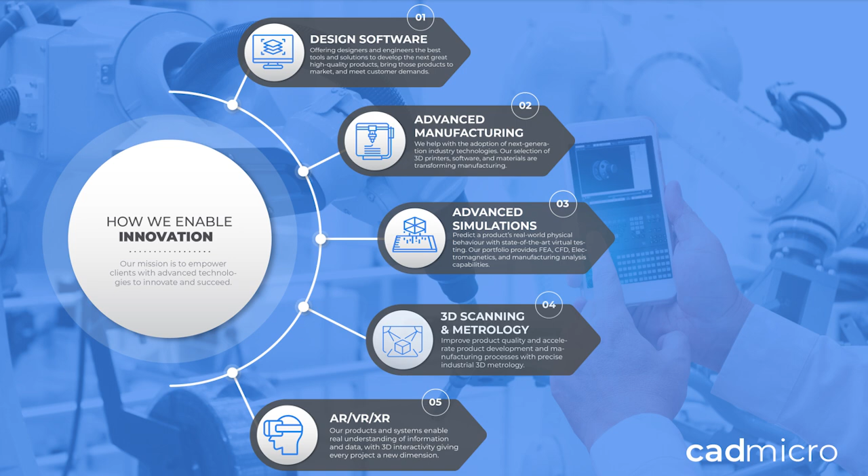Hello, everybody. Thank you for tuning into our webinar. My name is Fabio Colella. I'm a digital manufacturing application specialist here at CAD Micro Solutions, and today I'll be introducing and demonstrating Factory Simulation Engineer. This is a Delmia role on Dassault Systèmes' 3D Experience platform.

Today we'll be introducing the solution, identifying the needs of modern production, and then showing how Factory Simulation Engineer can meet these needs. Afterwards, we'll have a demonstration of it, followed by a question period before ending the webinar.

So what is Factory Simulation Engineer? Factory Simulation Engineer is a role on the 3D Experience platform that provides tools for manufacturing layout design and for factory flow simulation. Because it's leveraging the 3D Experience platform, along with it we get intelligent data management and tools

that enhance our collaboration. Through this, we can utilize concurrent engineering, meaning that our production planning can happen simultaneously with our product development, reducing our overall time to begin production. As an added plus, we also get large assembly performance, which is crucial for laying out and simulating real manufacturing scenarios.

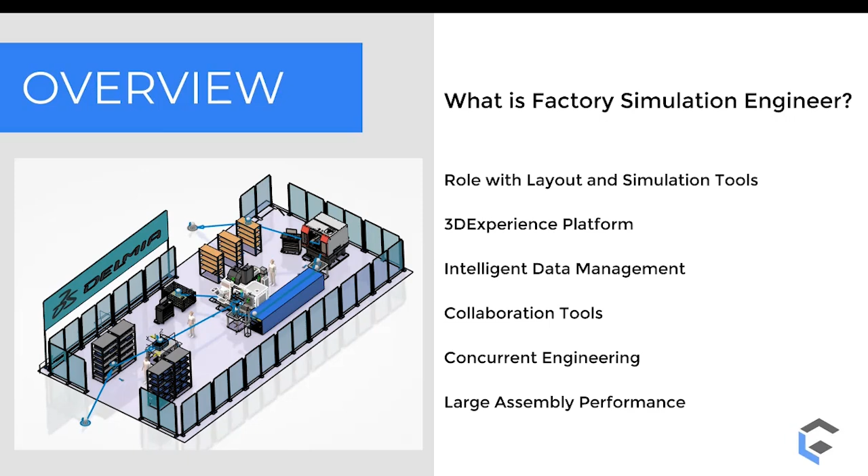So we've introduced the solution. Now let's briefly talk about the needs of modern production. As technology improves at increasing rates, all companies must grow to be competitive. We live in an experience market driven by high customization and demand by consumers. If we cannot be agile and smart in our production, we may face issues and adversity against our competitors who are. In order to work smarter and not harder, we need tools to help us do that.

In modern production, we need 3D visualizations and realistic simulations so that we can effectively plan and improve our manufacturing. We also need cloud-based solutions and data management systems so that all stakeholders can remain connected, from operators all the way up to upper management. Lastly, we need tools for team collaboration so we can improve our communication and streamline our workflow. Our ultimate goal is to be tracking and managing our KPIs so that we can always be improving our processes.

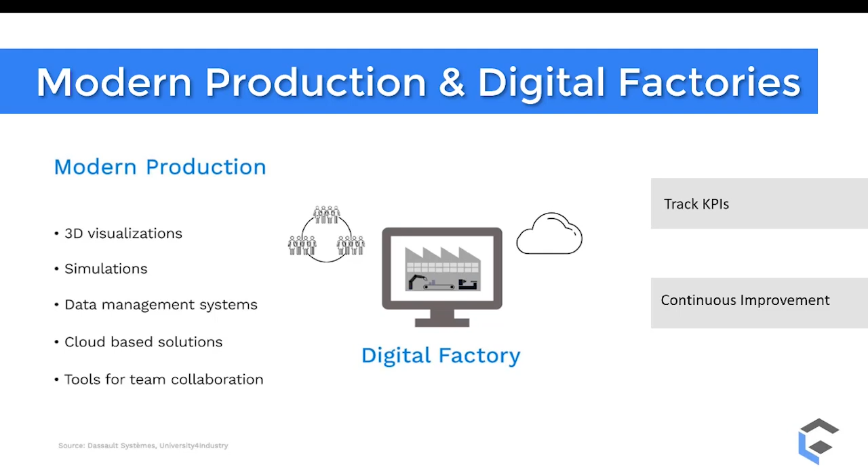Digital factories are like virtual twins of a real plant, where we want the digital factory to have the tools that meet our needs. Though there are many solutions that can house virtual factories, they are not all created equal, and some won't meet all of these needs. Factory Simulation Engineer is a solution that will.

Factory Simulation Engineer is a two-part solution. We have plant layout design, which allows component positioning and 2D, 3D visualization capability. It comes with a standard resource catalog for building factories, and it can also handle point cloud data of your greenfield or brownfield projects. This adds extra value when producing visualizations for all stakeholders in a project.

We also get factory flow simulation, which provides discrete event simulation and has a capacity to handle complex processes and scenarios. It can handle workers, AGVs, robots, pathways, CNC machines, so that we can simulate every process that would actually happen in our plant. It would also be used to analyze statistics and to identify bottlenecks or points of improvement.

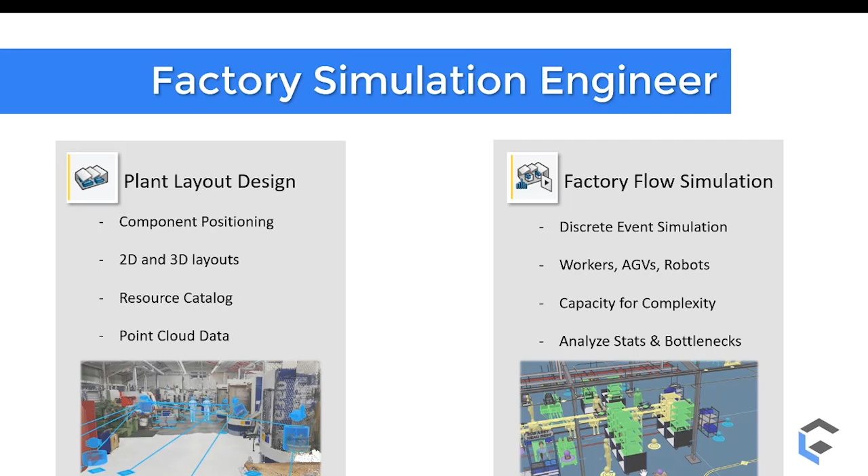And remember that these are all provided through the 3DEXPERIENCE platform. So in addition to their main capabilities, we get to manage our data smarter and work more efficiently as a team. With these tools, industrial and manufacturing engineers can create new efficient manufacturing plans, address production issues, and work on continuous improvement initiatives, all while minimizing risk and maximizing confidence that when we invest time and money into our plans, they will be successful. So they will produce better KPIs, they will improve our logistics, and they will improve our shop floor safety.

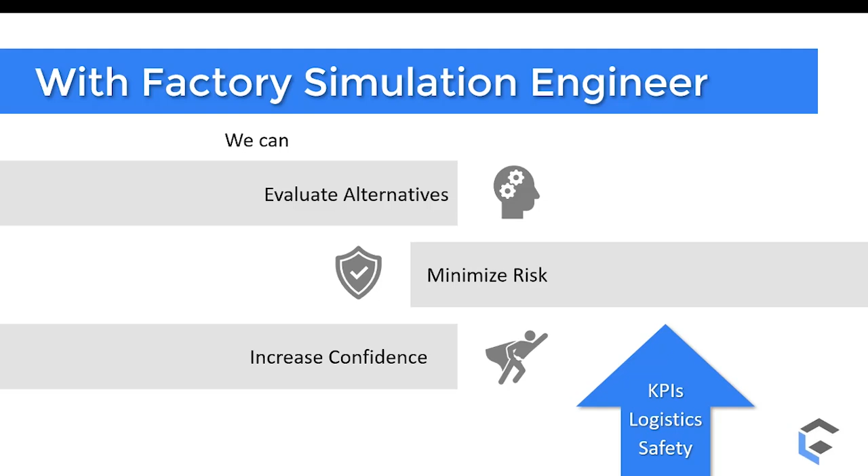We'll be creating the layout on the left side, which is a manufacturing cell that transforms the raw stock in the bottom left into the finished connecting arm on the bottom right. The raw stock has an initial machining process, an inspection, and a second machining process before being released for post-processing.

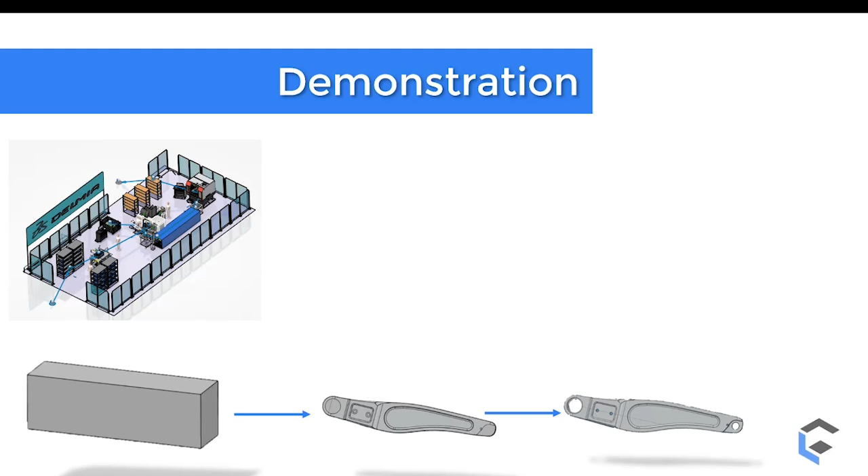We're going to complete the layout in plant layout design. We're going to complete the setup in factory flow simulation, and with that tool, we'll process the statistics and use them to determine some ways we can improve our current machining cell. Let's do it.

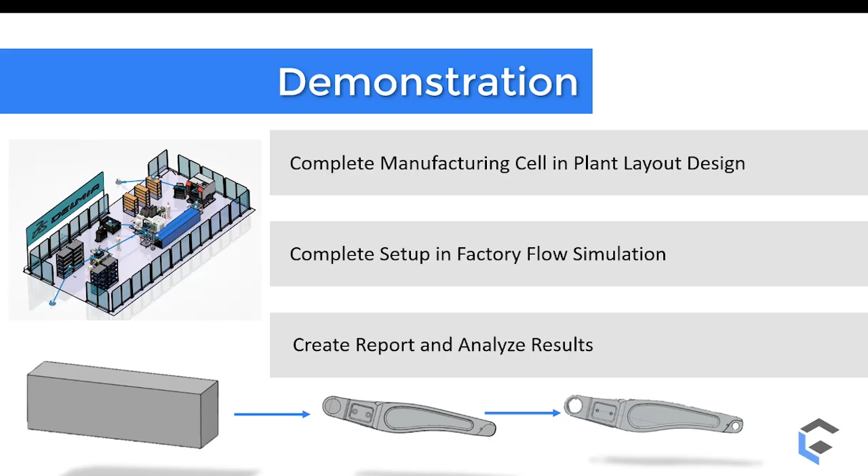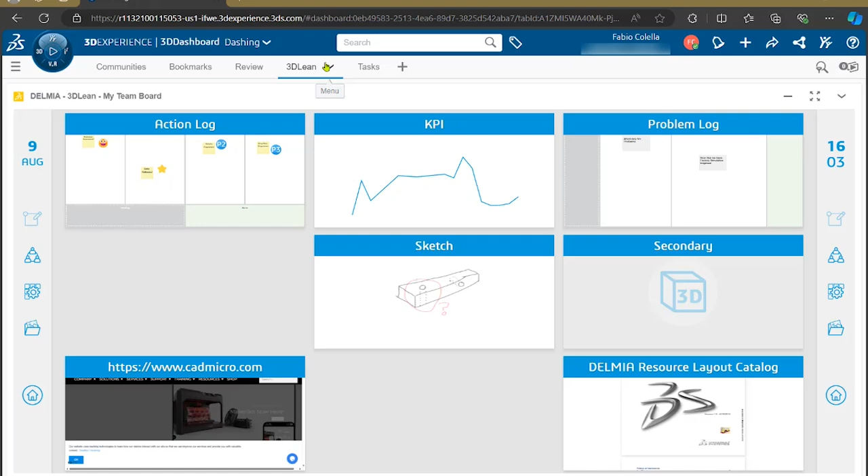Here I have the 3DEXPERIENCE platform opened up in my browser. Because Factory Simulation Engineer is provided through the 3DEXPERIENCE platform, we can utilize other apps and roles to improve our workflow and our collaboration. Here I have a Lean Team Player dashboard opened up, where my team can collaborate having meetings, sharing notes and documents, and tracking our progress through problems and production.

We have a note on our action log telling us to start working on our continuous improvement plan. My supervisor assigned me a task on the platform through collaborative tasks. When I open my tasks, I see one in the to-do section. My supervisor wants me to complete the layout of our existing manufacturing cell that one of my colleagues partially finished. I can move the task to in work.

In the task is an attachment of the manufacturing cell to complete. Because of the intelligent data system on the 3DEXPERIENCE platform, this is not a copy of the file, but a reference to the file. The platform's data system is built on single sources of truth and not worrying about file paths, duplicates, or broken links. And I can actually drag and drop this file right into my desktop app.

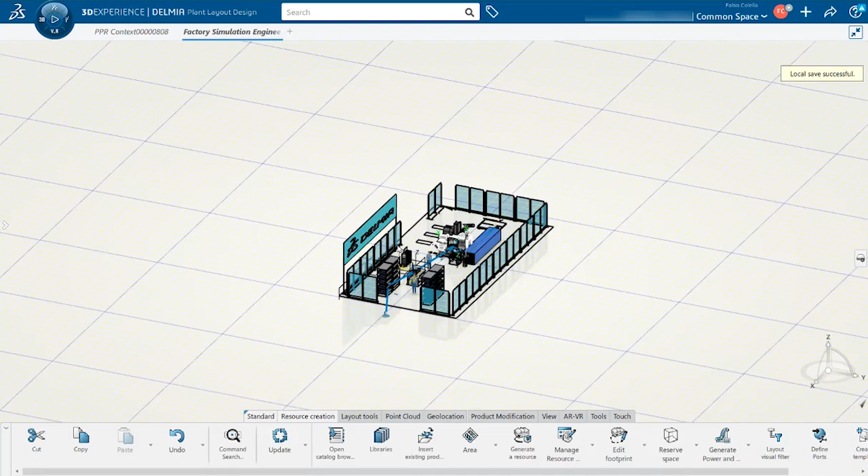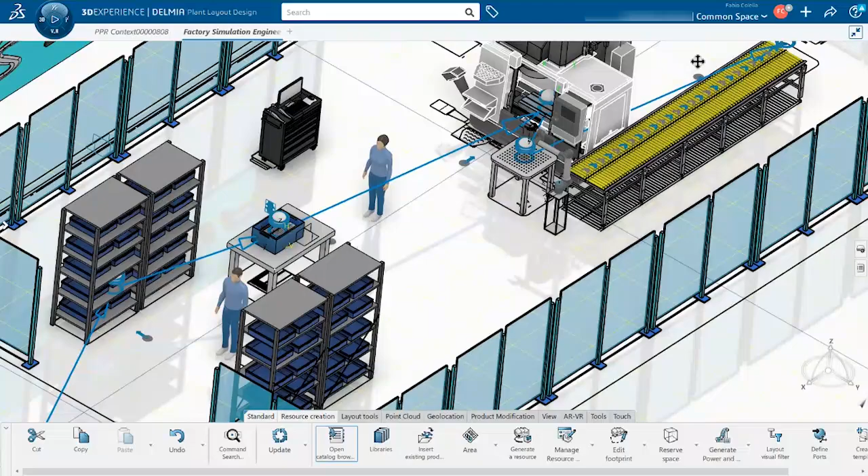Here we can see a cell partially laid out. We can see a couple workers, we can see some storage cells, a CNC mill, a pick and place robot, and a conveyor. On the right side of our layout, we can see a 2D sketch of our actual shop floor layout. We're going to use this to place the remaining items in their correct positions.

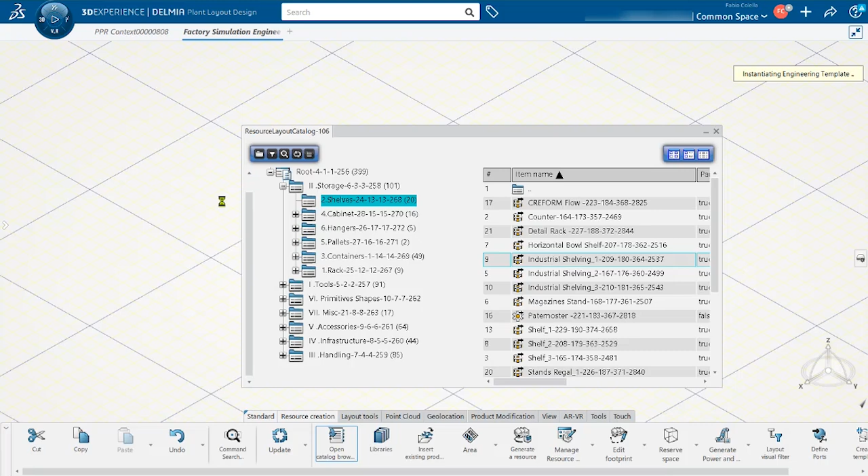We're going to open up our resource catalog that features a variety of different typical components that are very useful for layouts, like conveyors, storages, vehicles, and many others. Many of the resources are parametric, so they can be resized to meet your specs. We're going to use this shelf and drop it into place here. We will then modify the geometric parameters and then snap it into place.

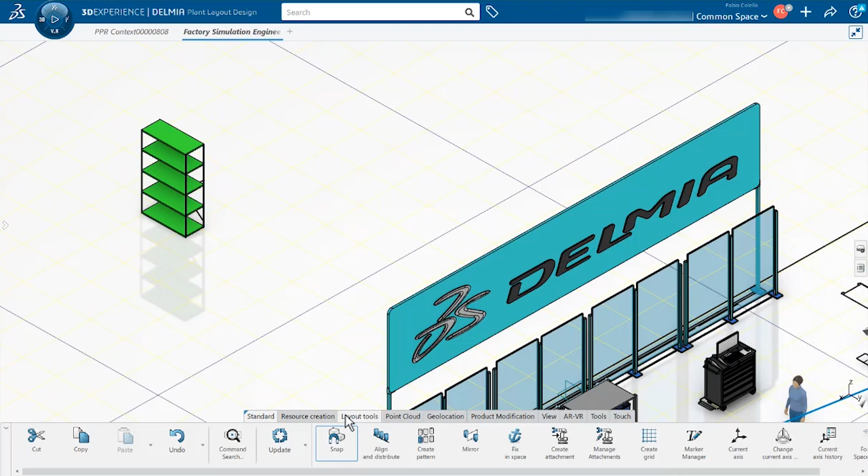For this particular shelf, we can modify the length, width, height, the number of racks, the rack thickness. In this case, the only thing we're going to adjust is just the width of it. Now we applied our geometric parameter changes, and now we're going to try to snap it into place. Using the snapping tools in plant layout design, we can select vertices and edges on our 3D models, and we can snap them to edges and points in our 2D layout.

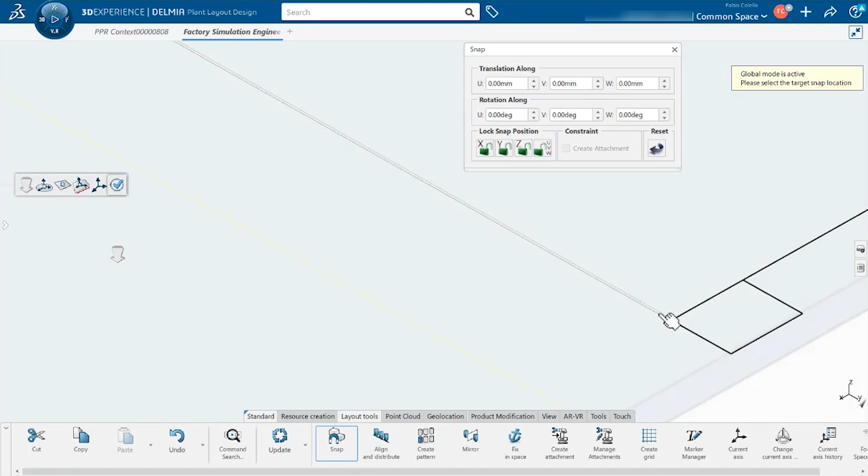Using the patterning tools, we can easily create patterns of our components in our layout. Now we'll drop in some components that we have bookmarked in our platform. If we go back to our browser and go to our bookmark editor, I can see bookmarks pointing to other components that I want to drop into our cell. We can easily drag and drop these components from our browser into our desktop app.

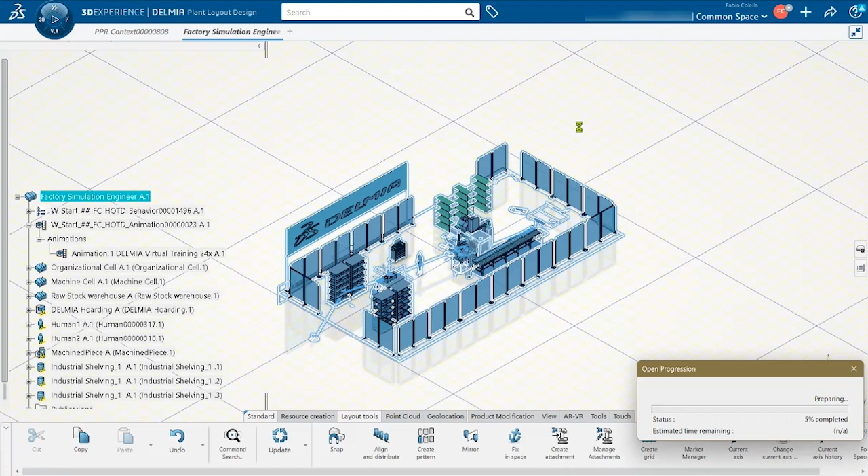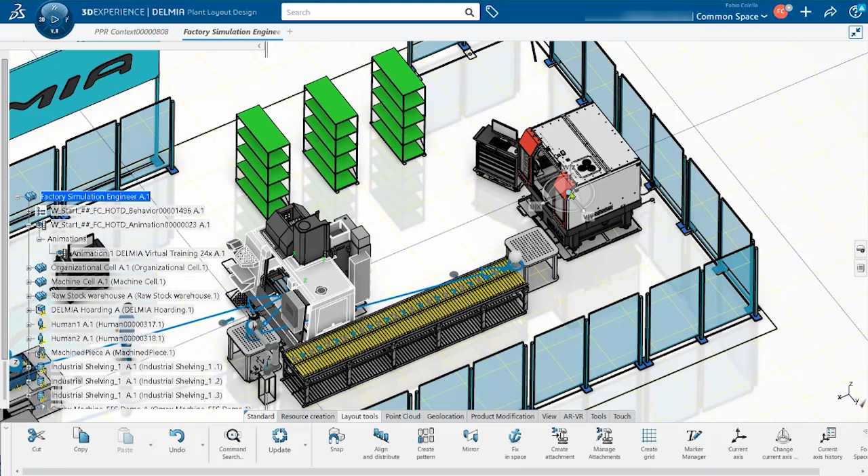We just put our second CNC machine and our inspection table into our layout. The inspection table is already in the correct position. We're going to use the layout tools in order to move the second CNC machine into position. Now we have our completed layout. We added another CNC for the final process of production, as well as an inspection table and some storages near the exit of the cell.

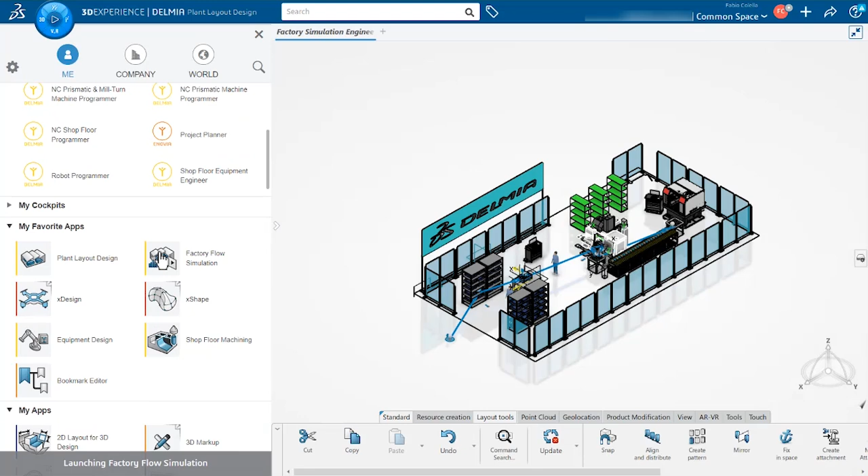Now we want to work on the factory flow simulation. We don't need to export any files or even open up a new program. All we need to do is go into our compass and select factory flow simulation, and now with the same file, we can complete all of our work. So now we've successfully switched over to factory flow simulation, and this manufacturing cell will remain the single source of truth, and we won't lose any data or interrupt any of our workflow.

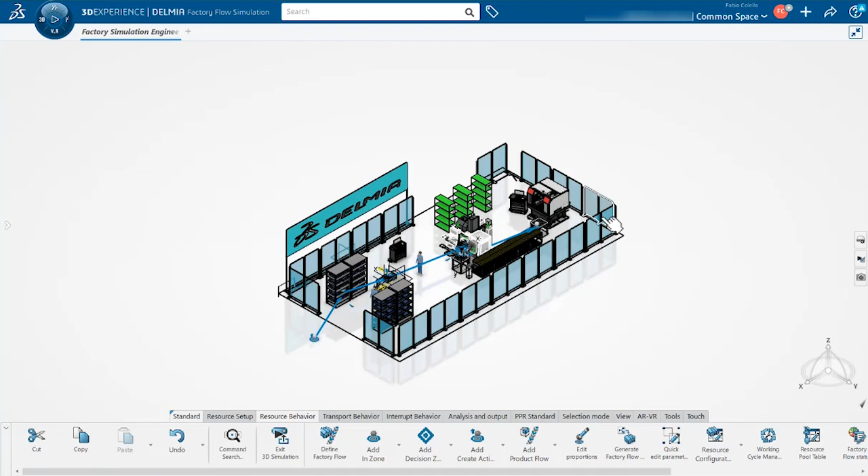What we want to do now is complete the product flow from one zone to the next, ensuring we set each resource and flow accurate to real life. We'll start by adding a third worker to the new section of our cell. We can add in resource zones that will represent where our worker will go when interacting with a product zone or completing an activity. A new worker has now been added into our manufacturing cell. We're going to drag them into the approximate zone that we want them to be working in.

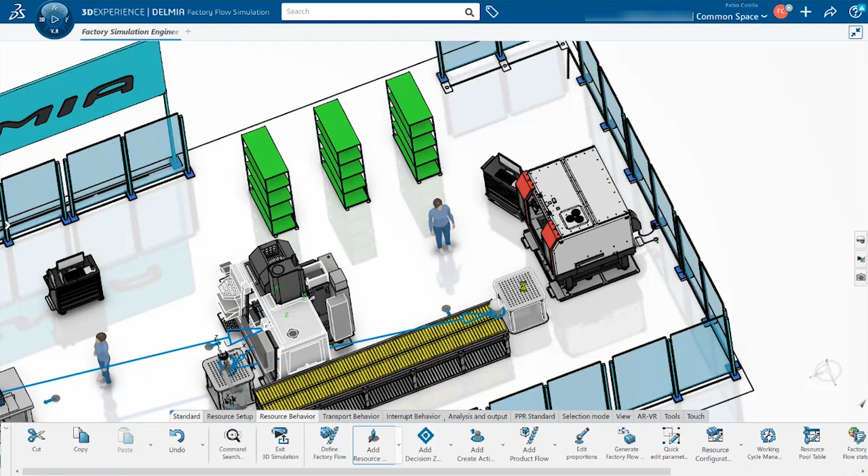After we place our worker, we're now going to place resource zones. These are the dots with arrows that will be placed right next to each resource that we'll be using. This is going to tell the worker where to move to when they're interacting with products and activities at those resources. We'll set one up for the inspection table. We'll set a resource zone for the second CNC machine. And finally, we'll set up a resource zone for the shelf.

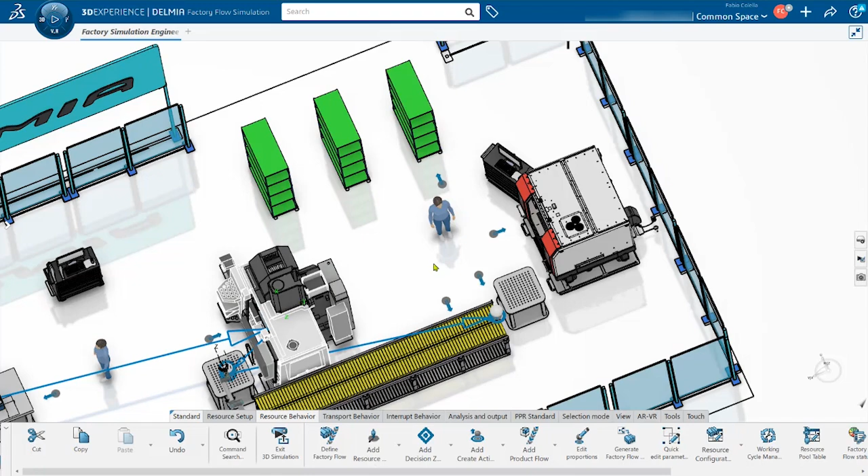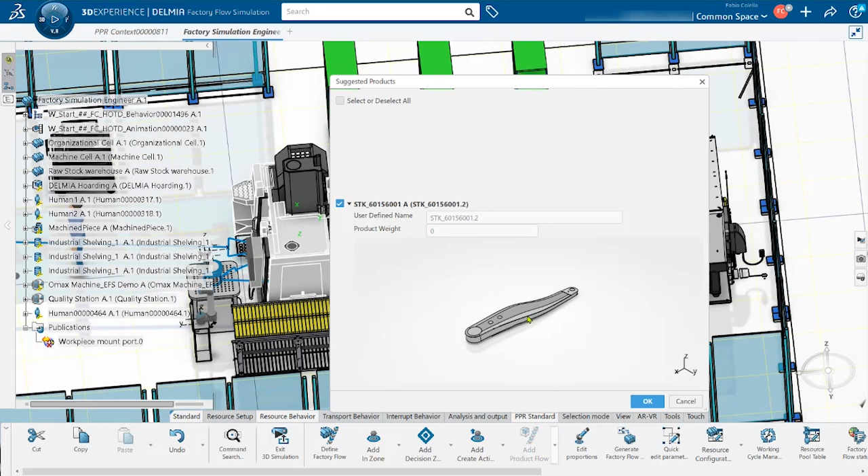Now that we've added our third worker and our resource zones, we want to start adding the product flow from each resource to the next. We're first going to add a product flow from the conveyor to the inspection table. It automatically picks up the part that we want to transfer. To the inspection table, we're going to add a generic activity.

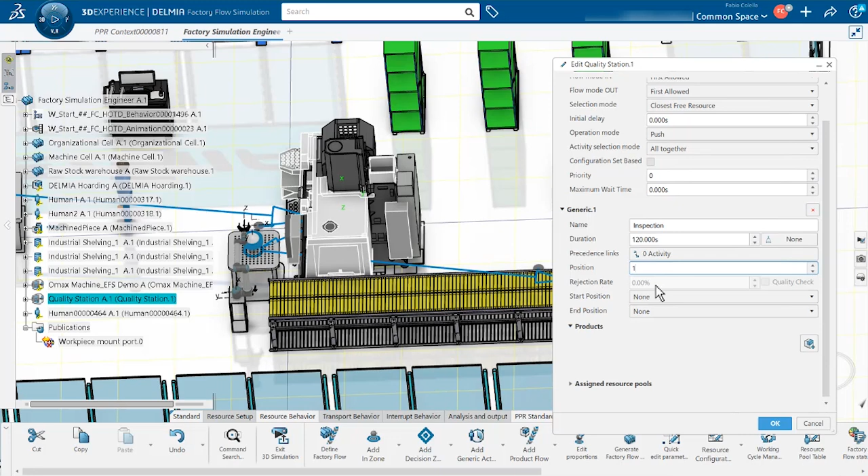This generic activity can be renamed to inspection. Inside of this activity, we can define how long it takes to complete, and we can also set a rejection rate. In this case, we're going to leave the rejection rate at 0 for simplicity's sake, and we'll set the duration to 2 minutes.

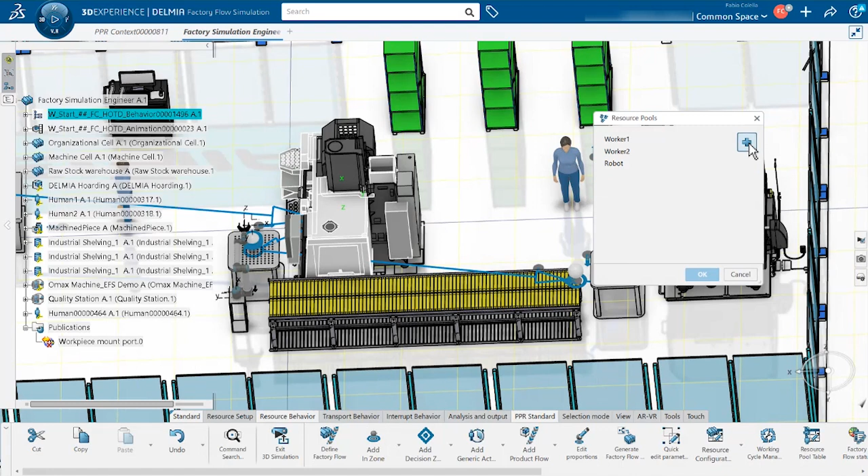This activity will automatically detect the product that will be used in it, and within the activity, we can also assign a resource to it. We're going to assign the third worker to complete this task. We can create a new resource pool that contains the newly added worker, and now they can be assigned.

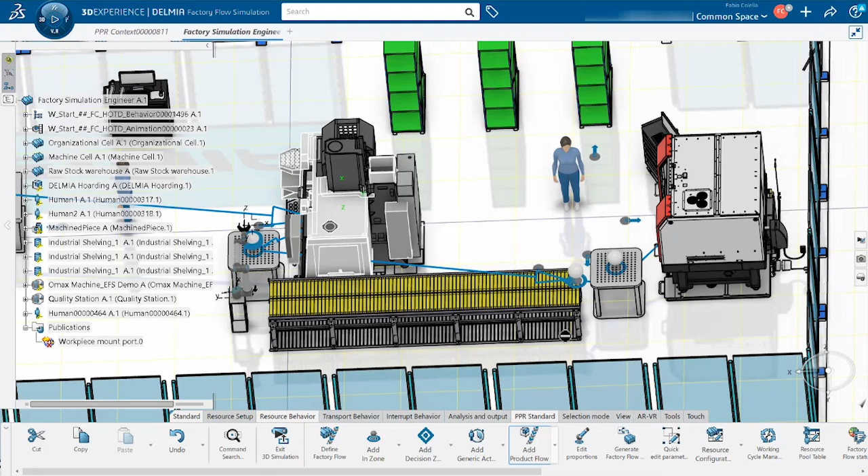From this point, we're going to add another product flow from the inspection table to the second CNC machine. Again, this will automatically pick up the product that will be used in the flow. Inside of our CNC machine, we're going to first add a load activity, followed by a transform activity, and then an unload activity.

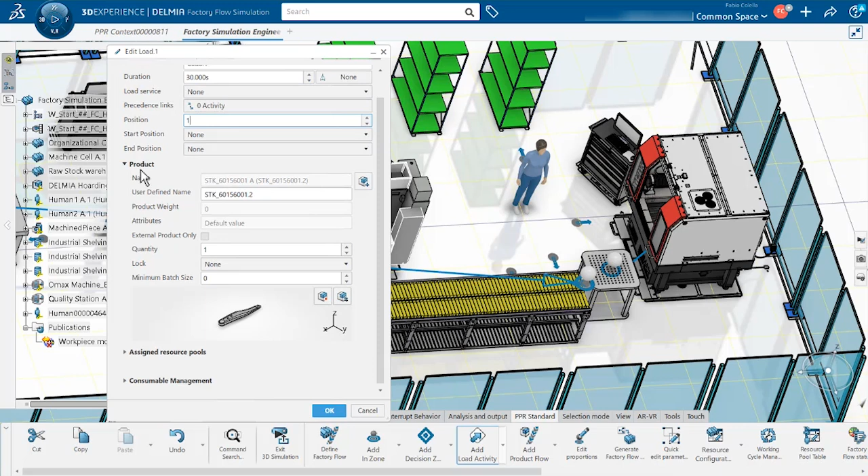In the load activity, we select our product, our intermediary stock. Here we can set a time for loading, set it to 30 seconds, and again we can assign a resource pool, which will be our third worker.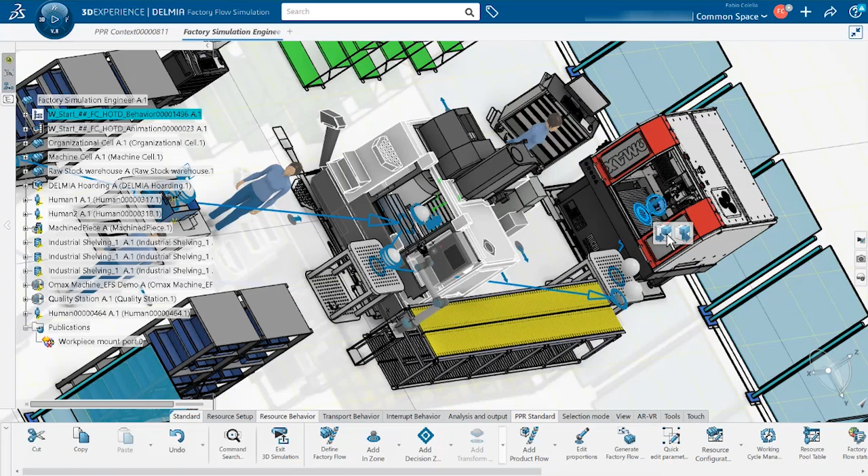Now we can add our transform activity. This is going to describe how the machine transforms one part into another. So we first start by selecting our input, which is the intermediary stock that we're sending towards it. After that, we're going to choose our output product, which is the finished product we already have sitting in our cell. So selecting it now.

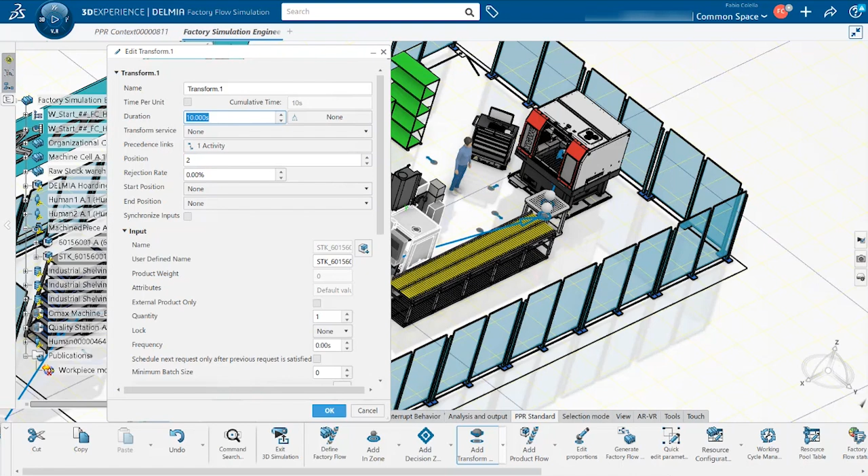You hit OK. And just like any other activities, we can define a time, we can define a rejection rate, and we can also, again, assign a resource pool. But because the machine is handling the transformation and not the worker, we won't assign a resource pool to this one. We're going to set the duration to 6 minutes. Here it lists our input product and our output product.

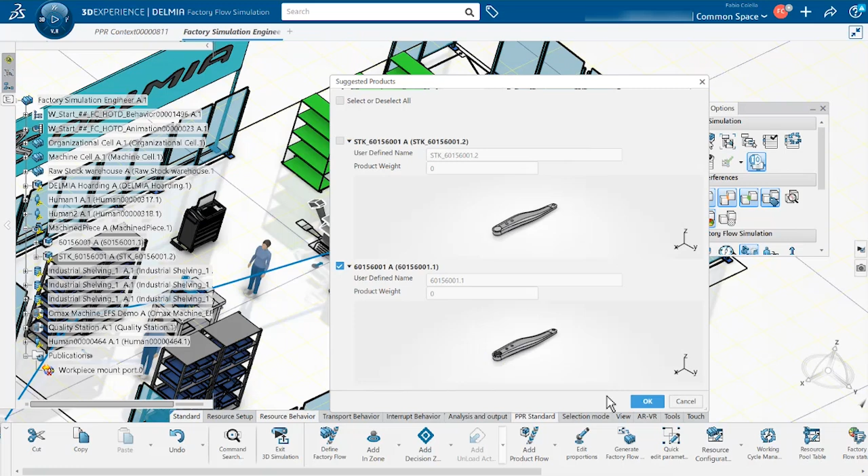And now we just have to add the unload activity. By adding load and unload activities, it's adding realism into our simulation, because not only is it capturing the time it takes to complete a cycle more accurately, but it's also going to be accounting for how much time worker 3 is interacting and busy actually working. So we're going to be able to tell how much they're being utilized when we run our report at the end.

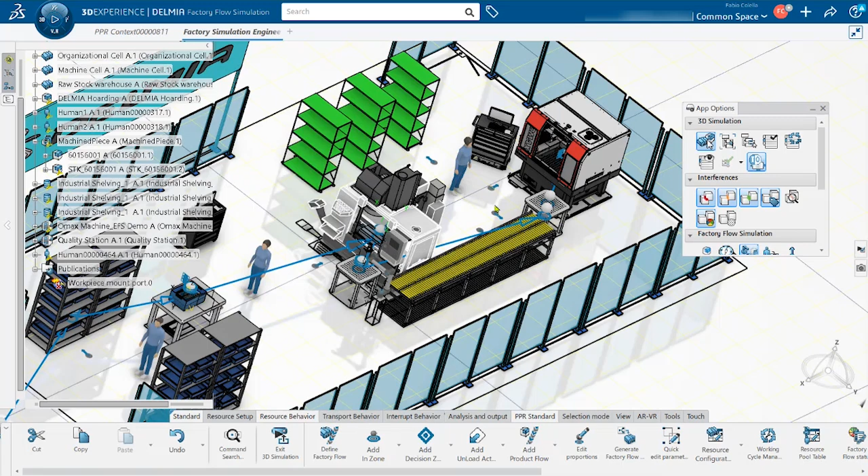Now we have to complete our flow from the second CNC machine to the storage shelf. And then finally, we're going to add an out zone. This out zone is going to be the end of our simulation. So on the far left, we have an in zone, which starts our simulation, and this out zone will essentially be used for dispatching and counting all of our outputted product.

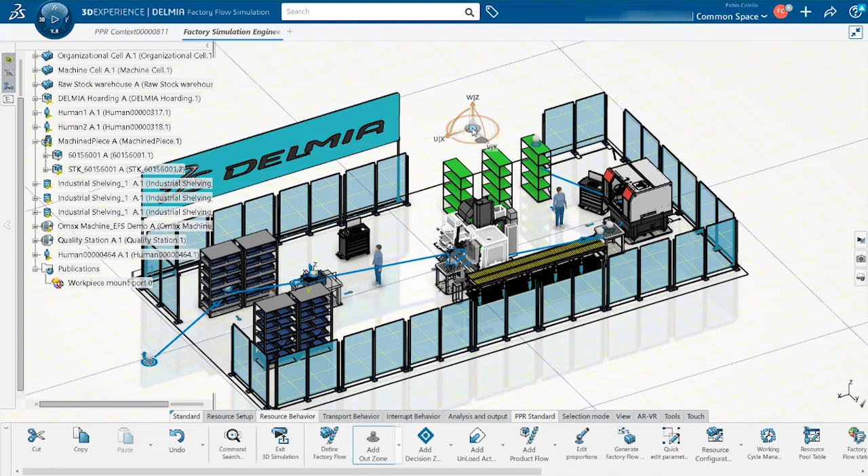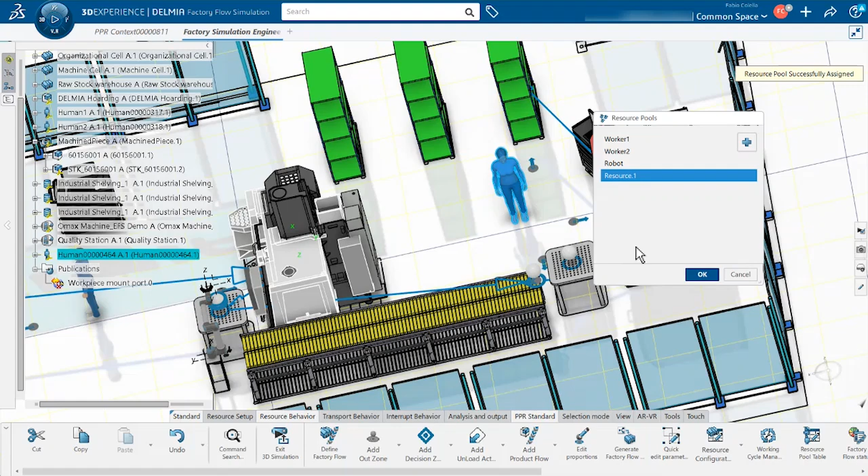Now the final thing we'll do is assign the worker to each product flow. And again, this is going to help capture how much this worker is actually being utilized, and it can also help to track things like ergonomics and logistics. If we see this worker has to walk a lot and in awkward areas, once we see that in the visualization, it's a lot easier to understand than if we have to try to imagine it ourselves.

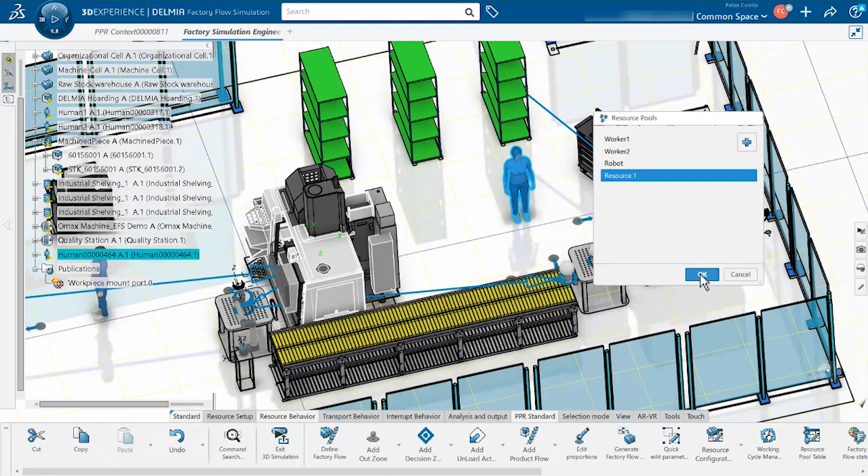So now we've completed our flows, completed our product zones, we've added activities to all of our product zones and completed the flows necessary. One option we have between our resource zones is to automatically compute collision-free paths for our workers. And if our workers had to cross stations, you can automatically compute that path, and you can specify how much clearance they require from an object in order to pass through.

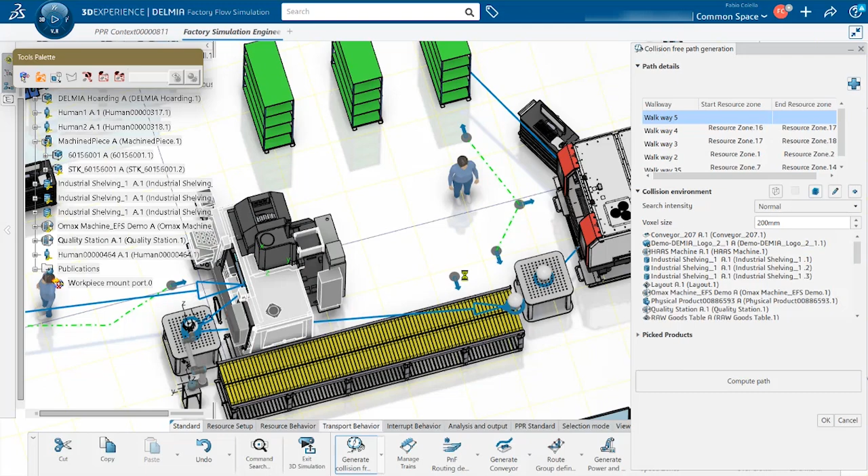And I'll show you some of these pathways made on this left side here. So you can see a collision-free path was made from the storage shelf to the secondary storage bin for that worker.

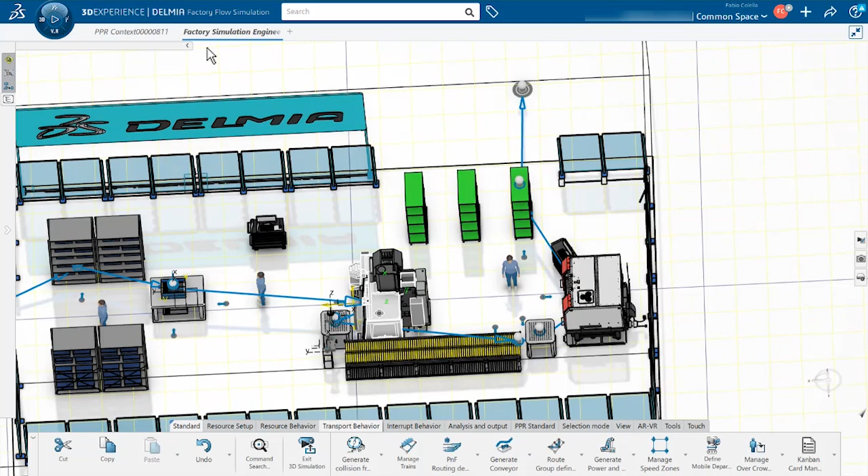So we've set up everything we needed to do for our simulation. All we need to do now is just to verify that our flow is going to be correct, so when we run our simulation, we're not going to encounter any issues. We can check the factory flow status very easily within Factory Simulation Engineer.

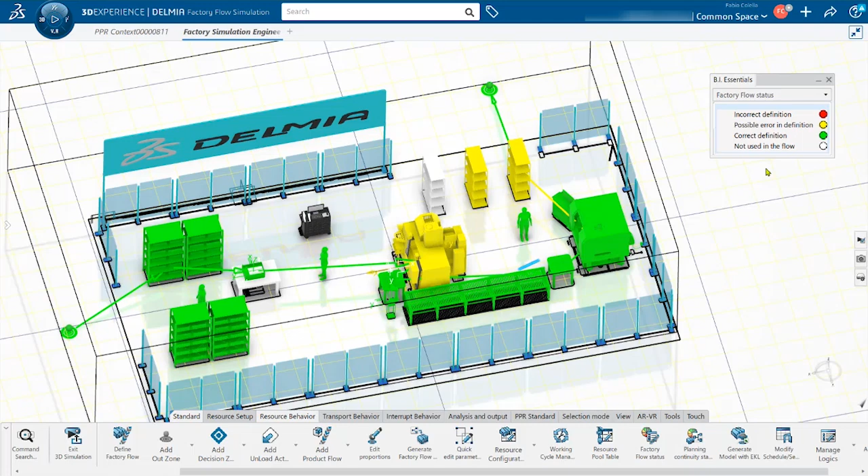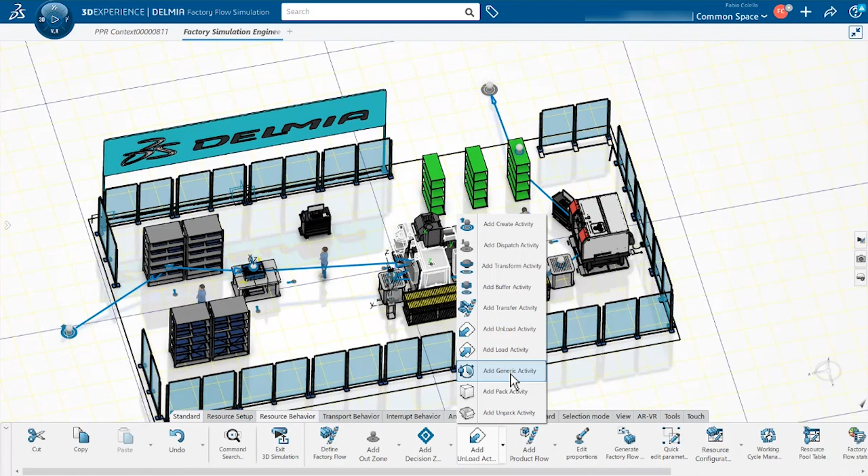This will give us a graphical display of varying degrees of issues or definition errors in our setup. So yellow can lead to possible errors, possible mistakes. Red would obviously be a serious error, and green is good to go. In this case, it's really just the output on our final shelf we're concerned with. It's not utilizing any activity.

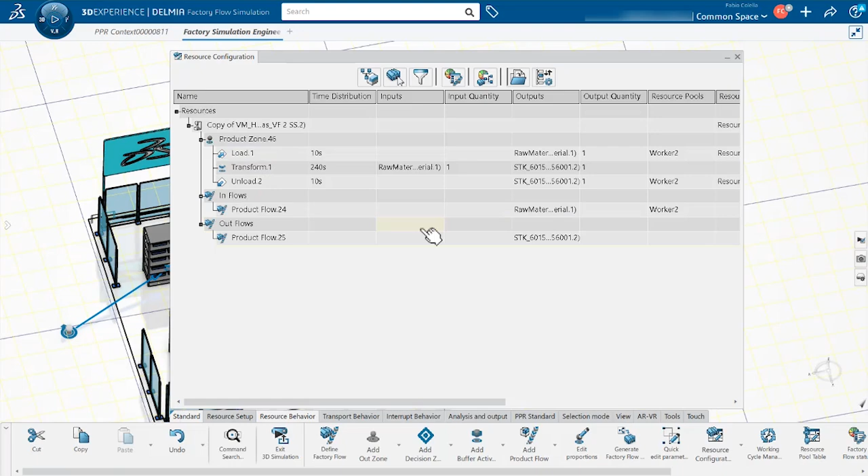So we're going to add an activity there, a buffer activity, which is going to represent the quantity of final products we're going to put on the shelf before it moves to the out zone. We can double check, and that first CNC machine showed yellow as well, but from the configuration table, I can verify the stuff that's important to our simulation is set up correctly, so we should be good to go.

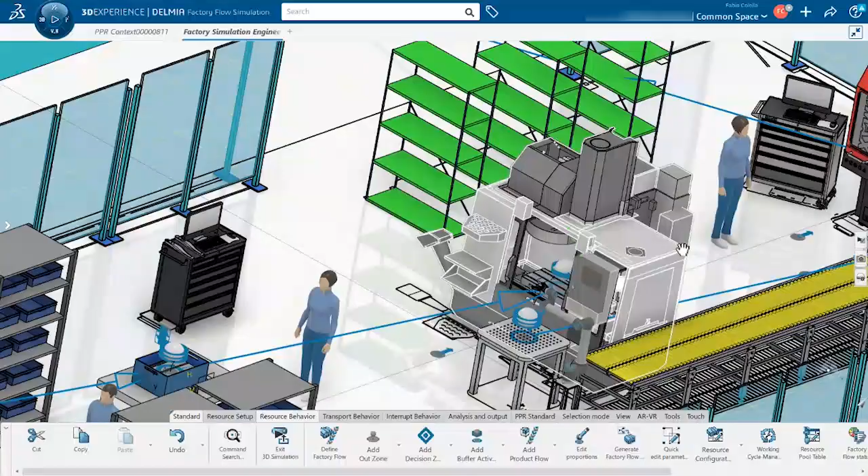Here we start with an in zone flowing to a storage shelf where worker 1 is going to move stock into that bin. Then worker 2 is going to take stock from that bin and place it into the machine. The machine is going to machine it down into the intermediary stock and place it on the table.

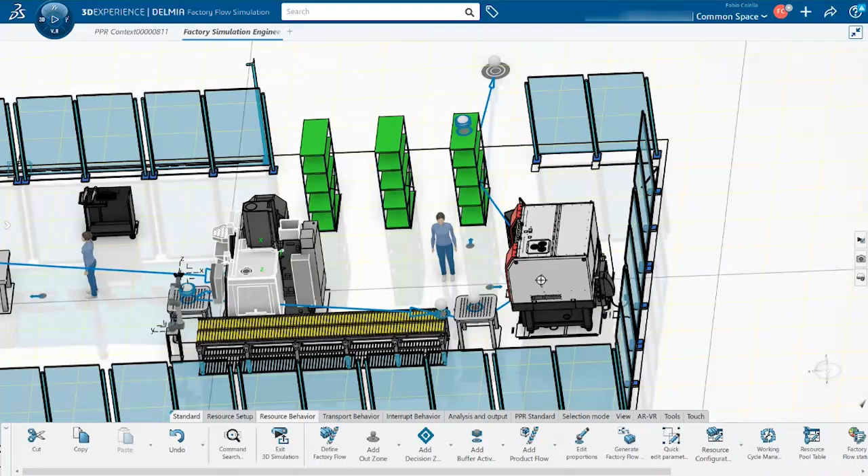There we have a pick and place robot who will pick up the intermediary stock and place it on the conveyor. It'll go down the conveyor where it is picked up by worker 3 and placed onto the inspection table. Worker 3 completes the inspection and moves it on into the second CNC machine, after which it is moved to a storage shelf and finally moved out of the manufacturing cell. We're good to start our simulation.

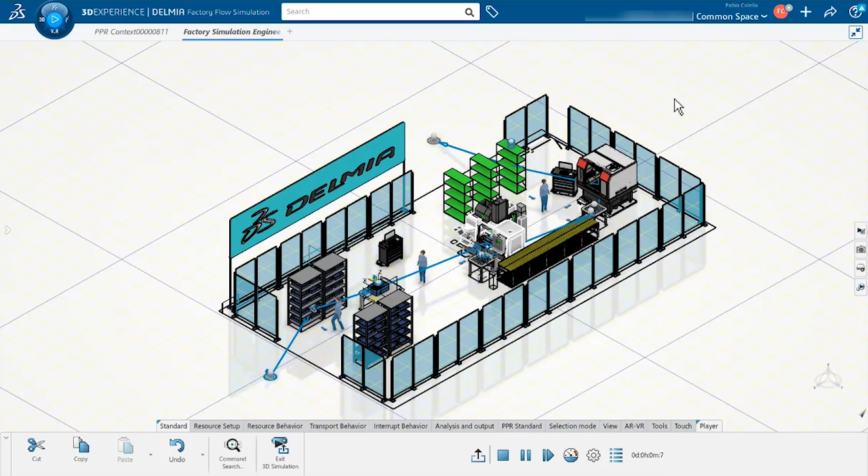To start our simulation, all we have to do is hit the play button in our compass. This will automatically begin simulation in our file. As you can see, the workers start moving right away. We have worker 1 placing stock from the first shelf into the bin. The bin has a capacity of 5. Worker number 2 will move that to the machine.

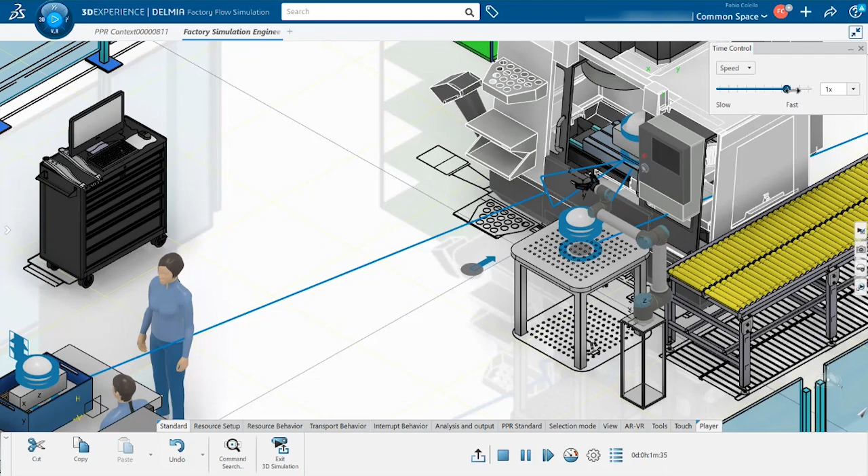I can modulate the speed so we can increase the speed of our simulation. So right now it's moving very quickly, a little too quickly for us to see, but it comes out of the machine, the robot moves it onto the conveyor, it gets put to the inspection table, inspection gets completed, the part gets removed from the machine to the shelf, and the part on the inspection table gets loaded into the machine.

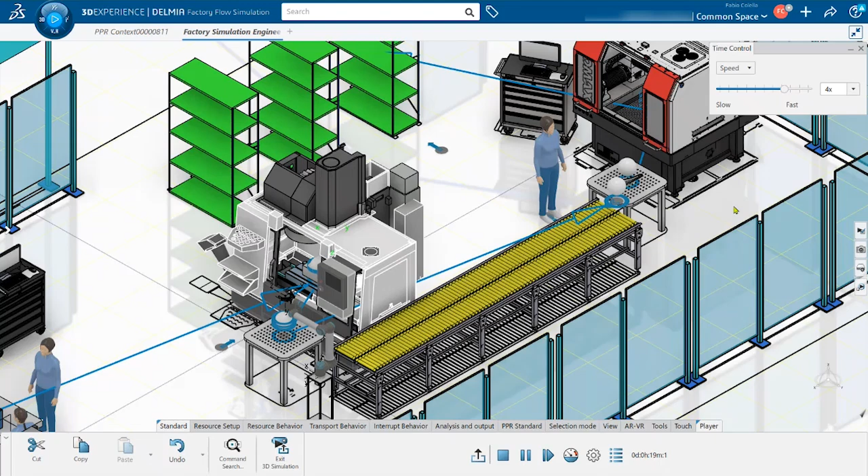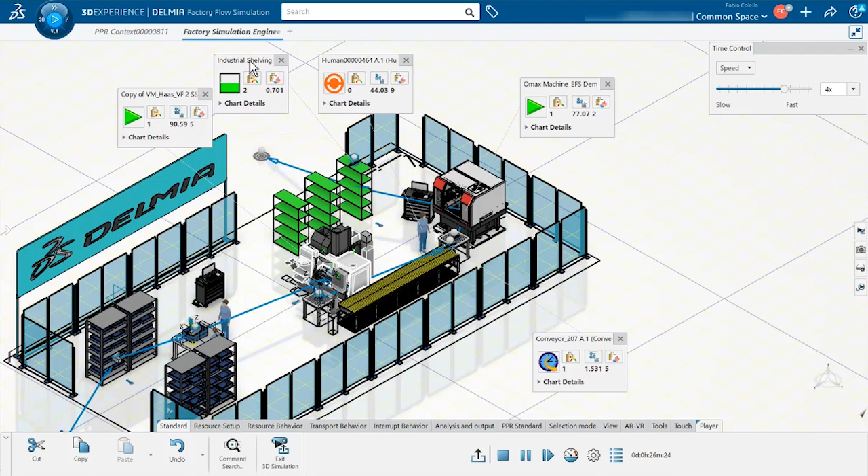Another cool option we have here is that we can click the different resources in our factory setup, and we can watch the live state of each. So we can see their status, how many items they've processed, how many are in process, and a variety of stats in the meantime. So every single resource and product zone that's involved in here, we can see it all. Really, really handy, especially seeing the status.

Being able to see the status of each one of our resources is really useful, because as we're just watching them, we don't necessarily know what they're doing, especially the machines, for example. So we can see when they're processing, we can see when they're idle. This also helps us troubleshoot our simulation.

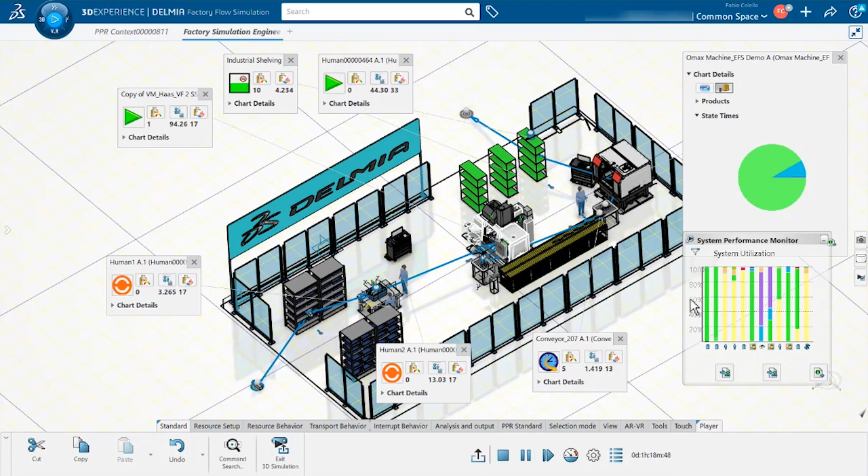We have some simulation options. We can enable replays, we can change our step sizes, stuff about our animation. We can define a lot of different settings that can help us get the power we're looking for. We can also open up this system performance monitor so we can track a variety of different resources utilizing different colors to help us visualize as we're watching. But the most useful thing is going to be at the end when we can export a report in XML format. It's very easy to read, and it can give us insightful data that we'll need.

So our simulation is complete. We ran it for 8 hours, so we wanted to simulate a full shift to see what the results were at the end of that shift. We're able to quickly check the report.

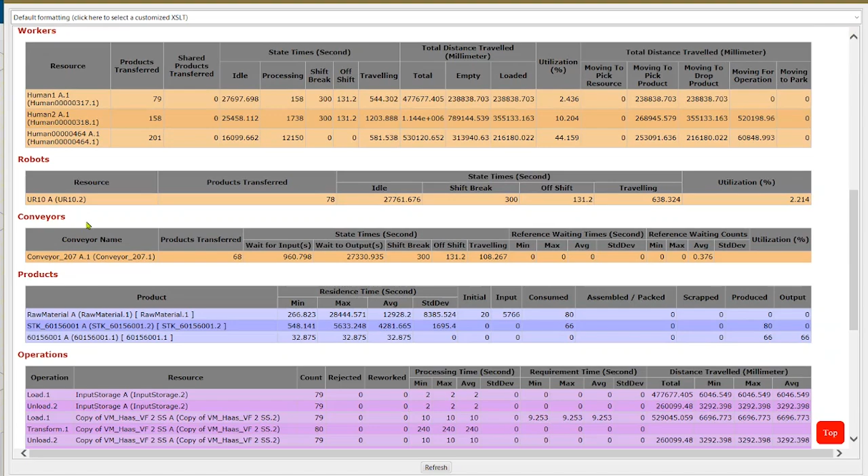So in our report here, we have a variety of tables covering arrival and dispatch, production, storages, workers, robots, conveyors, products, operations, product inventory, and cycle times. So when we're provided with all of this information, it really helps us make informed decisions.

So the process that we'd want to work with is essentially creating a simulation environment and getting results that mimic our current real-world results. From there, we'd want to propose and implement changes in our virtual factory, run the simulation again, and get the statistics to confirm that the changes we want to make will produce the improvements we're looking for. So this solution, Factory Simulation Engineer, can really reduce the costs and decrease the time it takes to evaluate changes and to gain confidence in the solutions we're proposing.

If we look at some of the data we see in this table, just at production, so these are our machines, we can see the second CNC machine at almost 100% utilization.

This right now is totally indicating to us that this could be a bottleneck or is very near to a bottleneck in our layout. And the way the cycle times were laid out, it 100% was a bottleneck in our simulation. As the simulation went on, intermediate stock was accumulating on the conveyor belt because the first CNC machine was producing it faster than the second CNC machine could process them. And once the stock had filled the length of the conveyor, there were no more products being pulled from the first CNC machine.

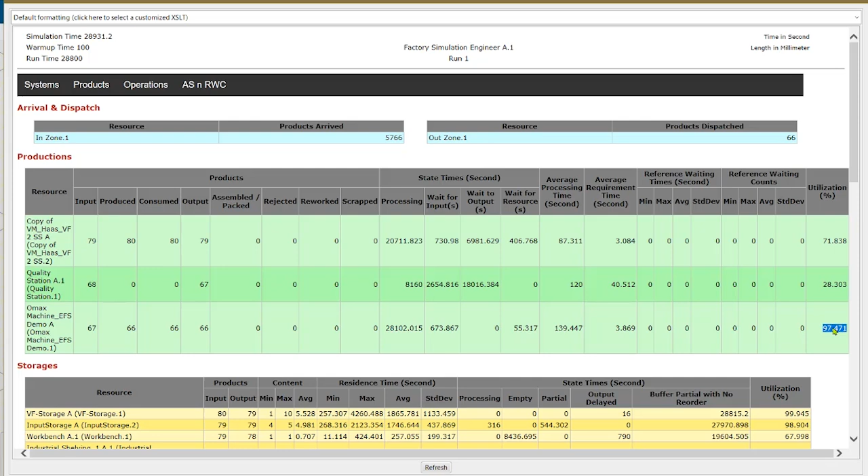So 100% in that case, utilizing both the statistics and the visuals of the simulation, we could easily determine that was a bottleneck in our system. So if we look at the utilization amounts of everything else and all this other information that we're given, we can really make insightful judgments and suggestions about what we can try to do to improve.

So even just looking at worker utilization, these numbers are altered because we hit a max capacity at a certain point on the conveyor belt. So there was a lot of idling. As you can see, there's a lot of seconds spent idling. So utilizing something like idle time, traveling time, and utilization amount, we could easily come to the conclusion that 2 workers weren't necessary in that one zone.

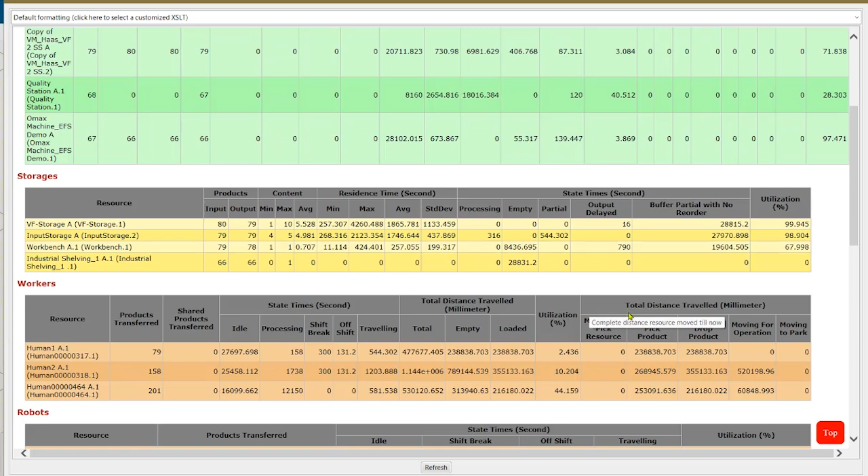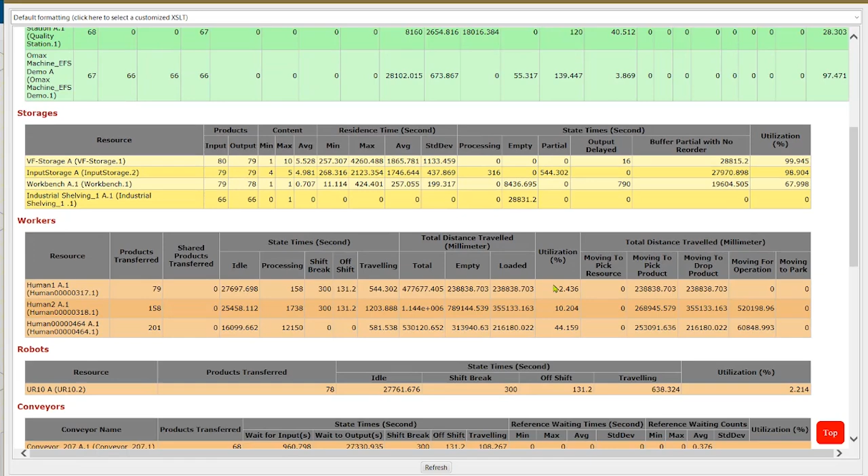And if we try to adjust and improve our machining time, or if we add a second machine, or somehow find another way to reduce that bottleneck at the second machine, we'll be able to improve our other machine utilizations, and we'll also be able to improve our worker utilizations. And this is just the tip of the iceberg. As things get more complex and we can track more and more products and machines, we can really start to create better reports and produce more meaningful information.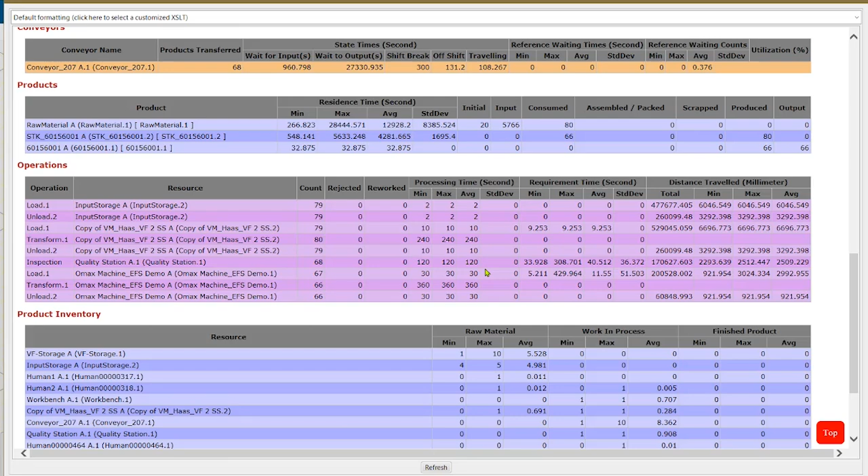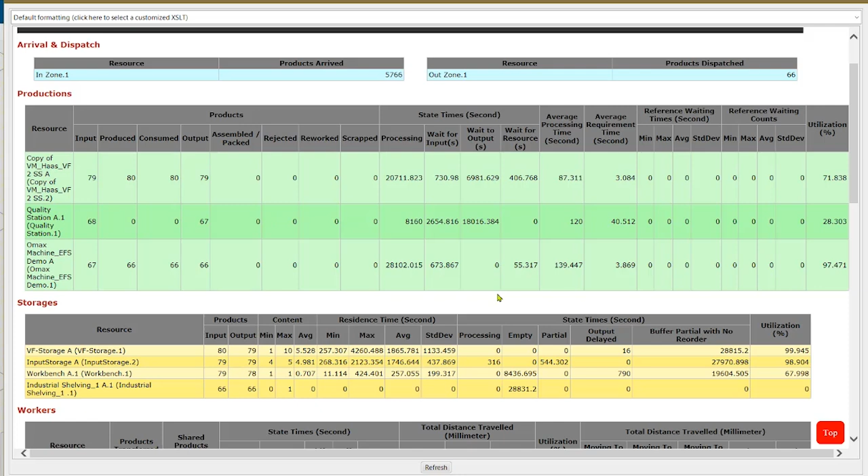These reports can also be exported. That way, they can be opened up in something like Excel, and we can add further visualizations to them to really make the most of the statistics and make conclusions from the data that isn't as obvious just from the table of numbers. But as you can see, there's a ton of power in this software, and the ability to work from simple to complex, and the fact that it's connected to the 3DEXPERIENCE platform is really a huge benefit.

With that said, we've reached the conclusion of our demonstration today. I really hope that the presentation and the demonstration were meaningful, and that I helped you understand the value and the power of Factory Simulation Engineer.

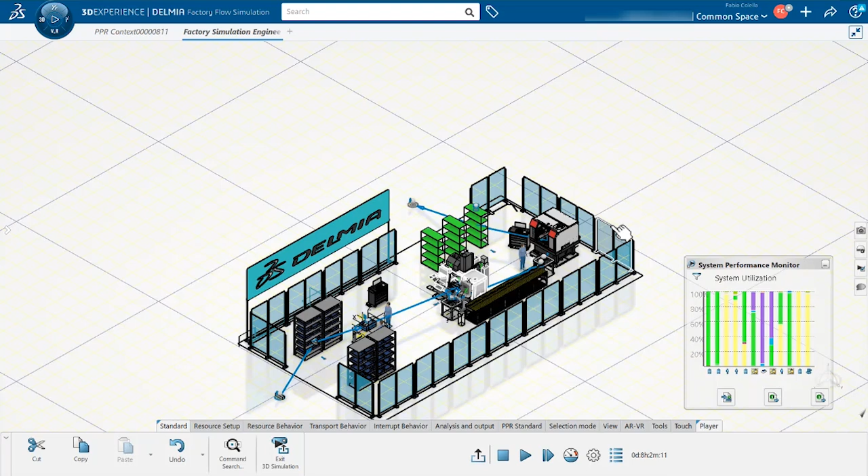The first one we have here is, how does DELMIA factory simulation handle the modeling of complex manufacturing processes such as multi-stage assembly lines or AGVs? Thank you, Shreya. That's a great question. Factory flow simulation can handle complex manufacturing processes like multi-stage assembly lines and AGVs. It contains functions to handle assembly and disassembly activities. It can also connect multiple manufacturing cells that each have their own unique purposes. There are also built-in functions to allow automatic and manual creation of AGV pathways. Then we can further assign these pathways and add in additional logic to create the scenarios we want in our factory.

Thanks, Fabio. The next one we have here is, how easy is it to import our existing CAD models into DELMIA factory simulation? It's a very straightforward process to add existing CAD models to factory simulation and into plant layout. The 3DEXPERIENCE platform is CAD agnostic, so no matter the file type or the software origin of the design, we can upload CAD models to the platform, and they can be managed equally with all of our other CAD data.